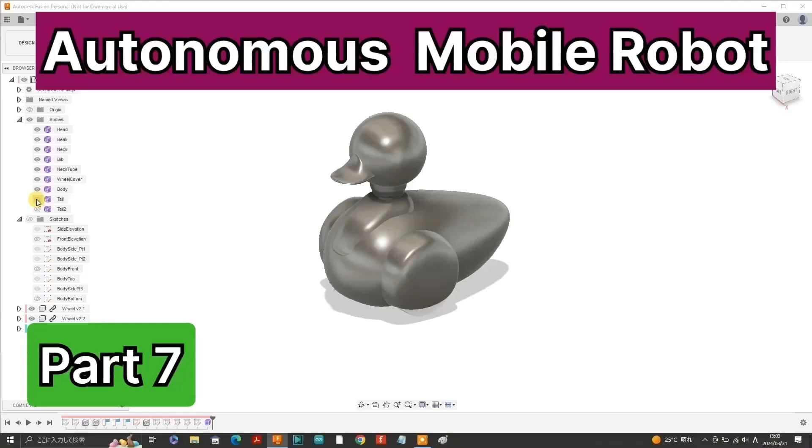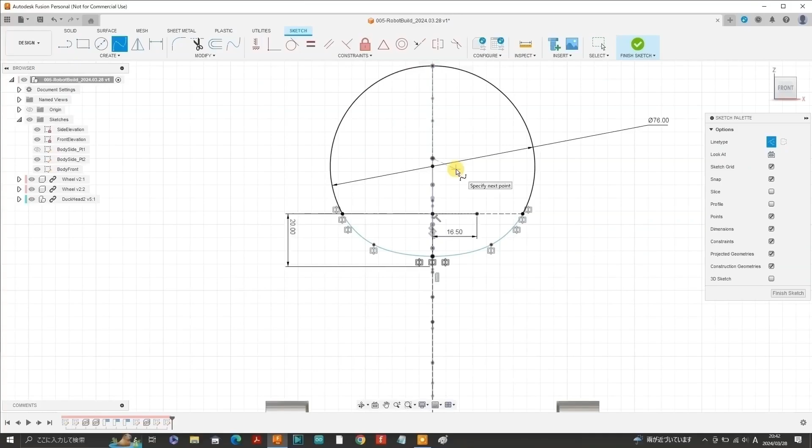Previously in part 6, after revealing my design, which resembles a duck, we started the design process using Fusion 360. Now we are at the plan view.

I think it's fine to use a perfect circle for the top view of the head. I set the diameter to 75 millimeters. Put in a few dimensions here. Can't remember how I arrived at the dimension of 44.2 millimeters, but here it is. 40 millimeters on either side of the wheel should come in handy for sketching the mudguards or fenders.

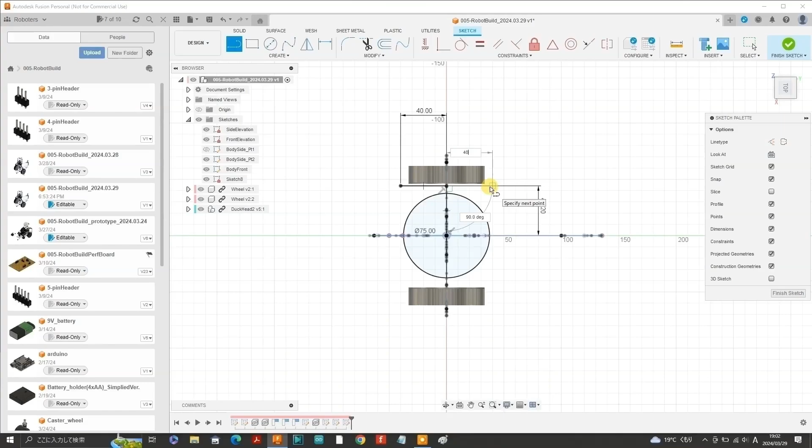Again, applying the exact same method to sketch the mudguard and then mirror that about the centerline here. Carry on sketching the rest of the body. Here I am sketching the plan view of the tail. Then sketch the plan view of the bib and then the plan view of the beak. So that's all the reference sketches I think we'll need.

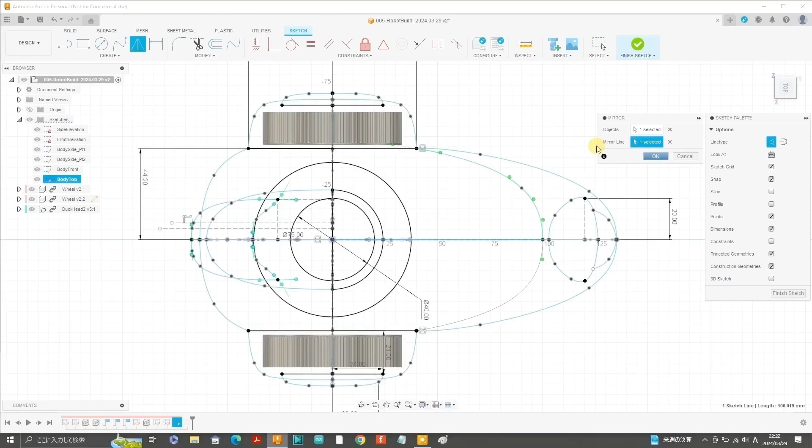Now it's time to create the actual body components. To do that, we'll first create a new component and label it head and hit OK. Next, select Create Form tool.

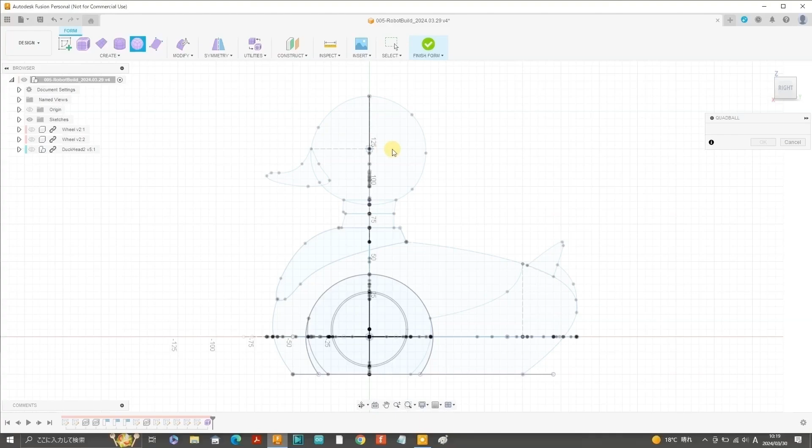Select Quad Ball from Create and select the YZ plane, or we could call it the side elevational plane if you want. Then select the center of your quad ball, upon which a spherical shaped ball appears, and set the diameter to 75 millimeters.

We want to mirror all the changes we make on either side of the elevational plane, but before we do that, we need to set the visual style to shaded with visible edges only. Okay, so in the quad ball menu, we see the mirror symmetry is set to length symmetry and is indicated on the quad ball by the green line.

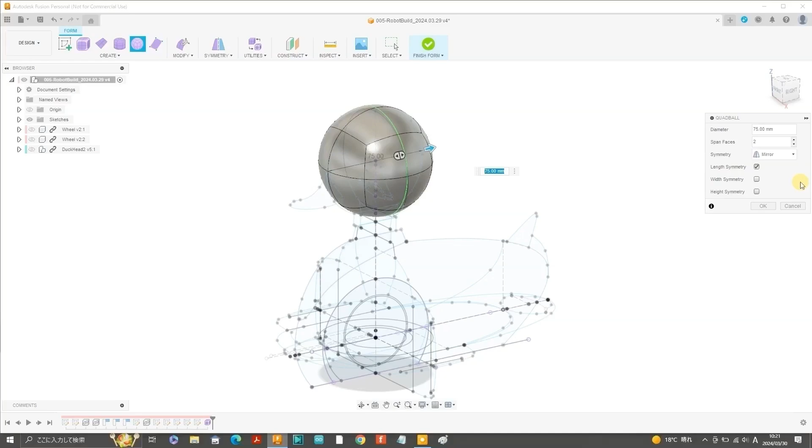However, that's the wrong plane. We want it to be aligned with the side elevational plane, which corresponds to height symmetry in this case. So we'll select that option on the menu and hit OK.

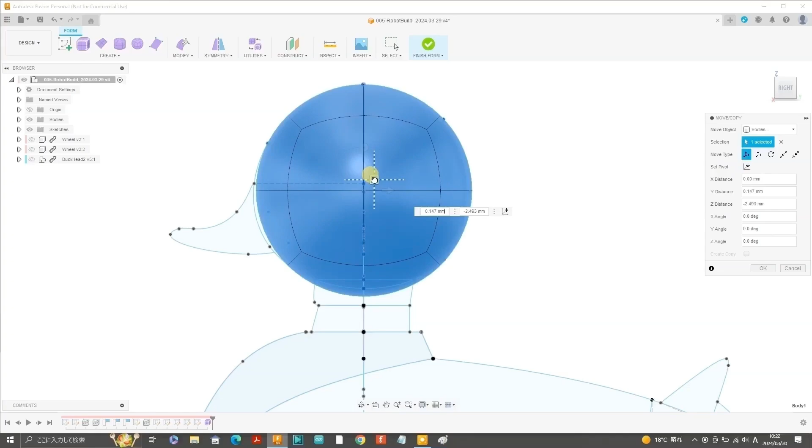Well, the spherical shape of the quad ball fits quite nicely, but we could do with a few adjustments. First, we select the Move Copy and move the quad ball down a bit. The quad ball seems to be in a good position here in each elevational view.

To adjust the shape of the quad ball, you can select or left click either a contour line or a surface. I've selected a surface here and then right click and move the surface to fit the reference line better. So it doesn't have to be exactly the same as the reference line either.

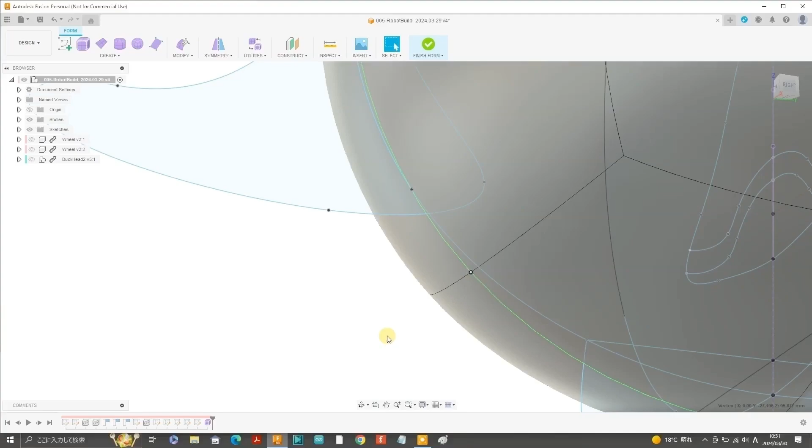Here I am selecting a lower point on the quad ball. It's sometimes a good idea to swivel the design around to more accurately select the point you want. Swivel it back, right click and move the point upwards until it coincides with the reference line. You can likewise select other points and move them toward the reference lines in the same manner.

Okay, the plan view doesn't look as though it needs any adjustments for the head. Next, we'll add another quad ball for the beak. We'll mirror the quad ball about the same side elevational plane, hit OK, and scale it up a bit. You can scale quad balls by selecting the center point and pulling it outwards.

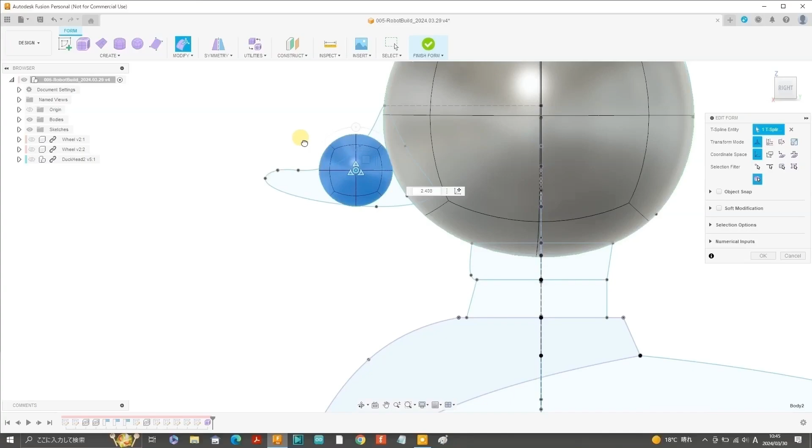Okay, so you can select points or surfaces and move them toward the reference lines little by little. The beak is quite a different shape from the original spherical shape of the quad ball, so it will take quite a bit of work to get the right shape.

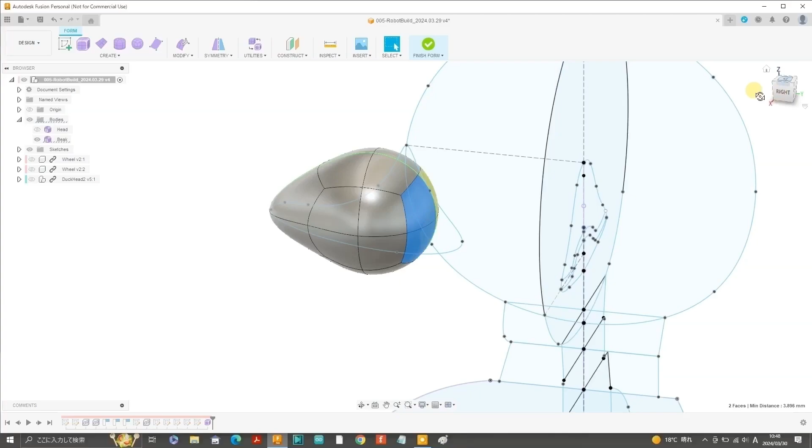You can hide the head for better visibility. Add a crease here at the back of the beak where it is to join the head by selecting these two faces, which automatically selects the other two on the other side of the symmetrical plane, and select crease from the modify pull down menu and then hit OK.

Carry on moving the points and faces of the beak to fit the side elevational view of the beak, and then turn to the front elevation and do the same. And then from the plan view as well.

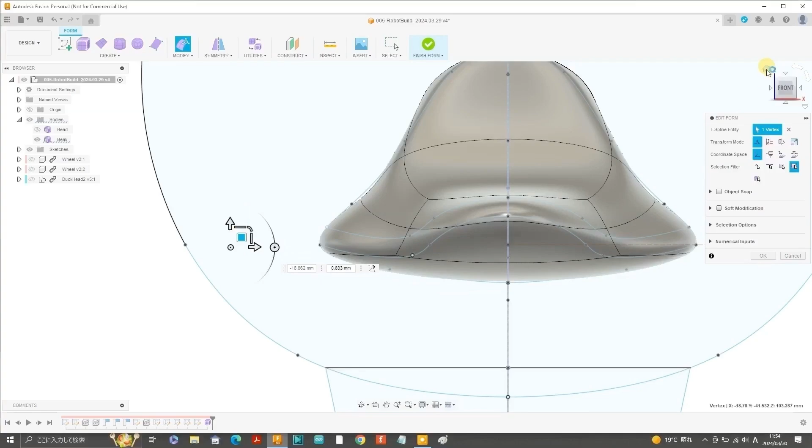Because the beak is such a complex shape, many adjustments will be necessary while swiveling between the different elevational views to make sure the shape works for each view. You can also use Smooth on the Modify pull-down menu to iron out any surfaces that have bent out of shape. Anyway, after a lot of work, I managed to achieve the shape I was looking for.

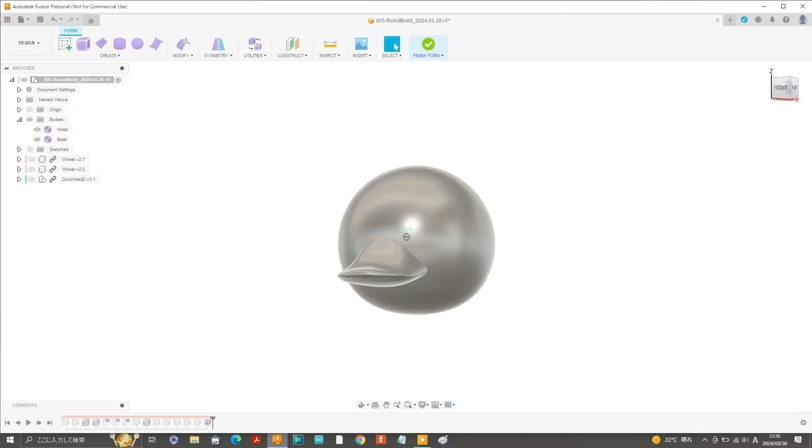For the neck, I initially chose this cylinder and shaped it very roughly in accordance with the reference lines, but I ended up changing this design, so let's move on.

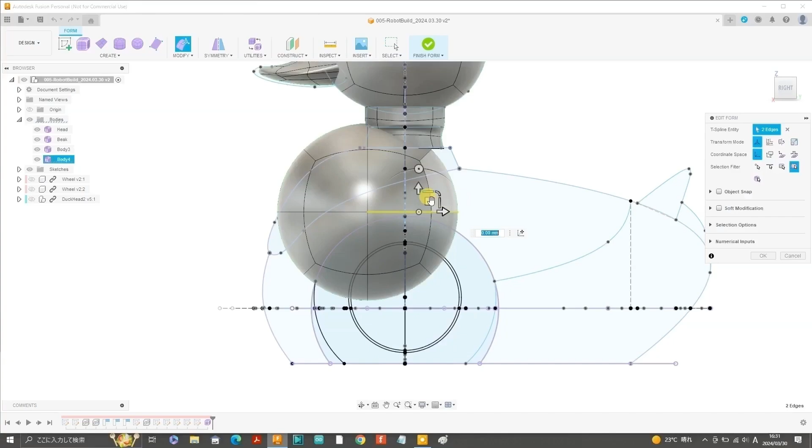Select another quad ball for the bib area of the body and allow it to mirror about the side elevational plane by selecting height symmetry. Start to move the lines, points or surfaces to the various reference lines little by little. This time we can create a crease along this line.

Select all the lower surfaces and just hit delete. Then continue to adjust the lines and points until we get the shape we want. I also added a crease on the top portion of the bib and flattened that surface.

Later on, I decided to fill in the hole that I created upon deleting the lower surfaces of the bib by selecting Fill Hole in the Modify pull-down menu.

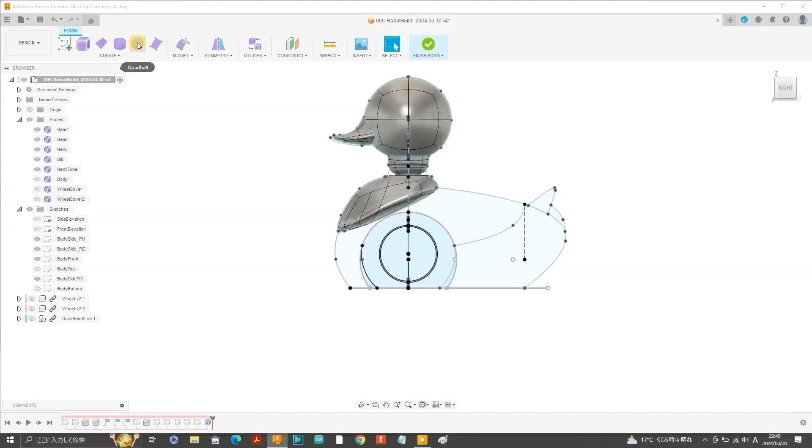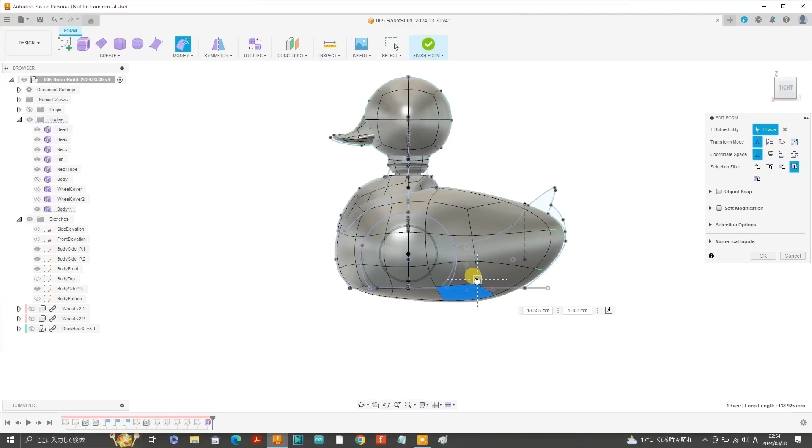Next, we add another quad ball for the main body. Change the number of span faces to 3. Select height symmetry again and spread it out to align with the reference lines using the same method - that is, selecting the points, lines or faces of the quad ball, right-clicking and moving them to a desired position. It is, of course, necessary to check each elevational view while adjusting the shape.

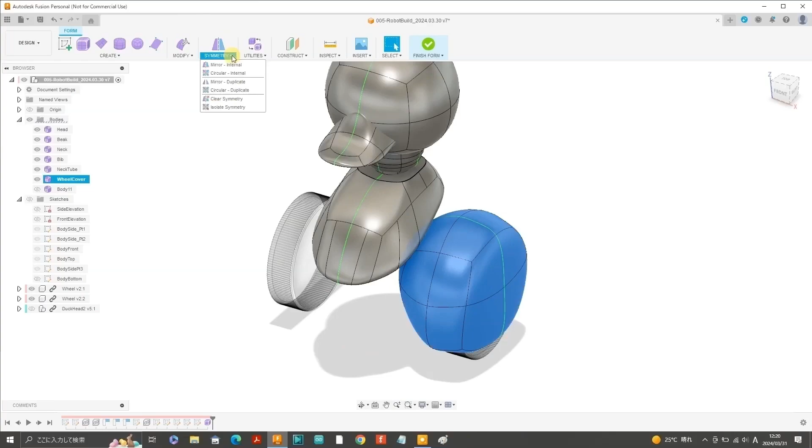I've unhidden the wheels now, and here I am halfway through forming the left mudguard or fender using another quad ball. Once that is done, we need to hide the main body. Select Mirror Duplicate from the Symmetry pull-down menu and mirror this object by selecting this plane here and hit OK.

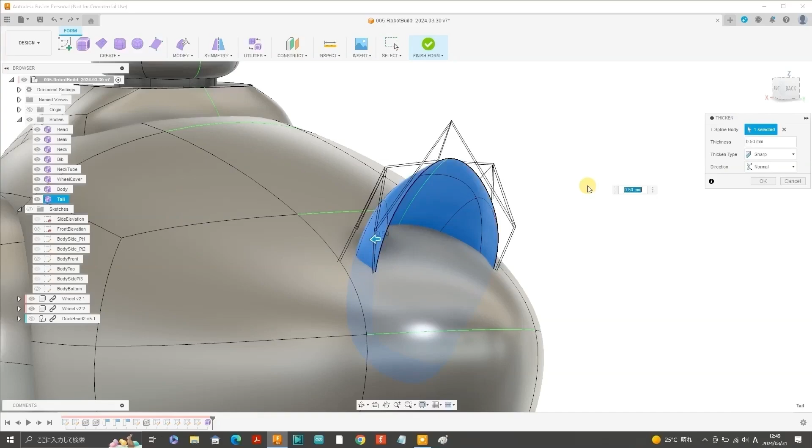Here's another quad ball for constructing the tail. I'm deleting 4 faces at the back, and then after finalizing the shape, select the lines along the edge of the tail, select Thicken from the Modify pull-down menu and give it a thickness of 0.5 millimeters.

Okay, now to finish the tail we need another quad ball and squash it into shape using the same method. We don't want the front side of the quad ball showing through here, so we'll squash that in too.

I've actually copied the body components I've just constructed and saved them to a separate file labeled body shell, to keep those components separate from the chassis components for now.

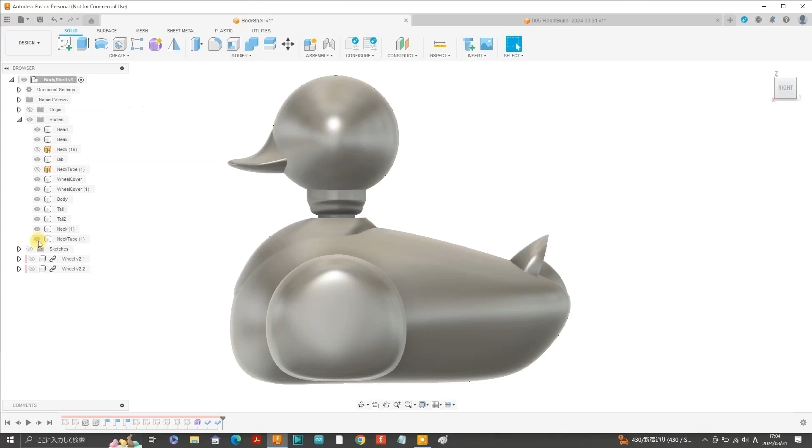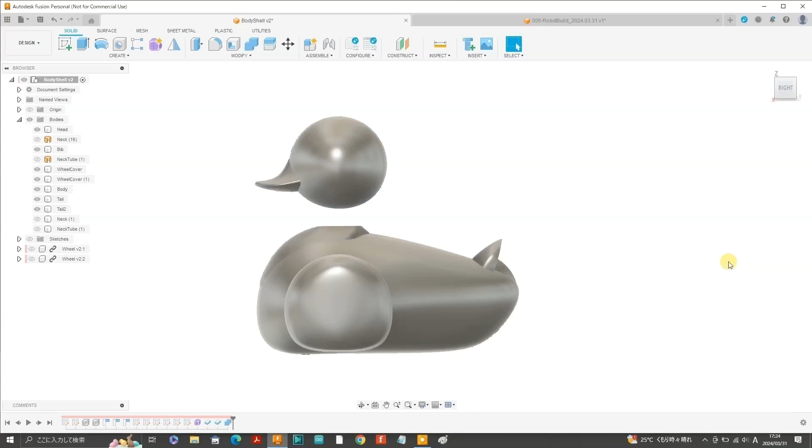Now it's time to combine all these separate bodies using the Combine tool. Select Combine from Modify. Select the head as the target body and the beak as the tool body, or vice versa is fine in the case of combining objects. Make sure that the operation icon is showing Join, and also make sure New Component and Keep Tools are switched off. We'll inspect that by selecting Section Analysis and selecting the side elevational plane. As we can see, the head and the beak are now a single integral component.

Now we want to combine the remaining objects in the same manner, except we won't be doing the neck or the 0.5 millimeter thick tail portion for now.

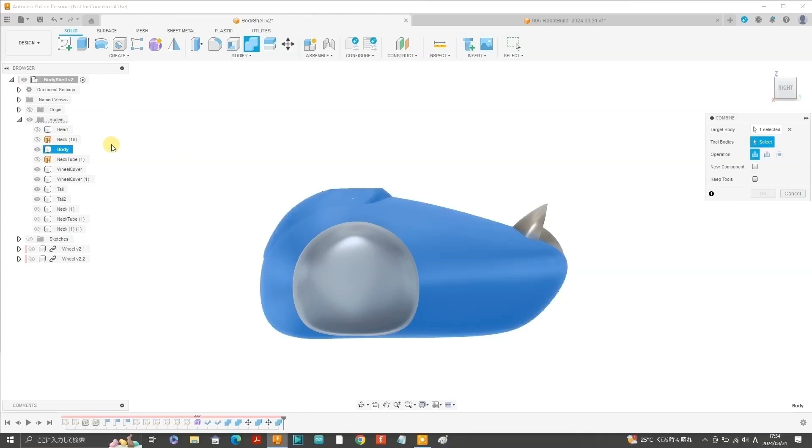I actually made the mistake of not combining the mudguards or fenders before converting the body to a shell. This caused numerous problems when it came for me to slice the body and add wedge reinforcements later on.

I made an extra copy to the right there because I was thinking of using that for vacuum molding, but I didn't end up needing an extra copy for that purpose.

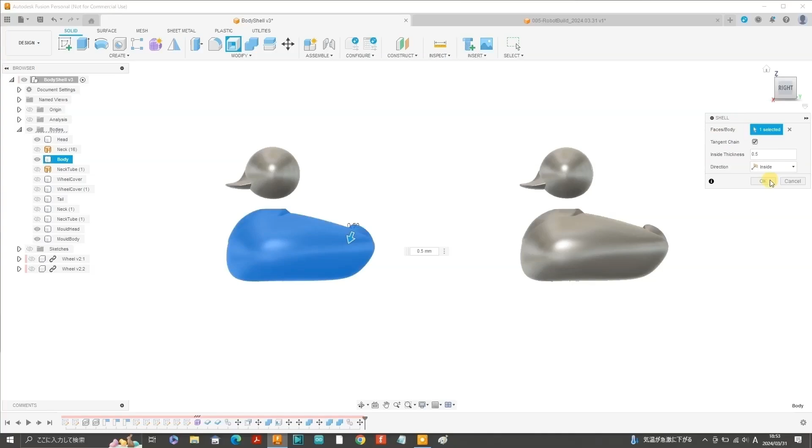So here I am converting the body to a 0.5 millimeter thick shell. Make sure you combine the mudguards first and then select the Shell tool in Modify and set the inside thickness to 0.5 millimeters. Then do a section analysis from the Inspect menu, and as you can see from the hatched areas, we have a 0.5 millimeter shell for the body.